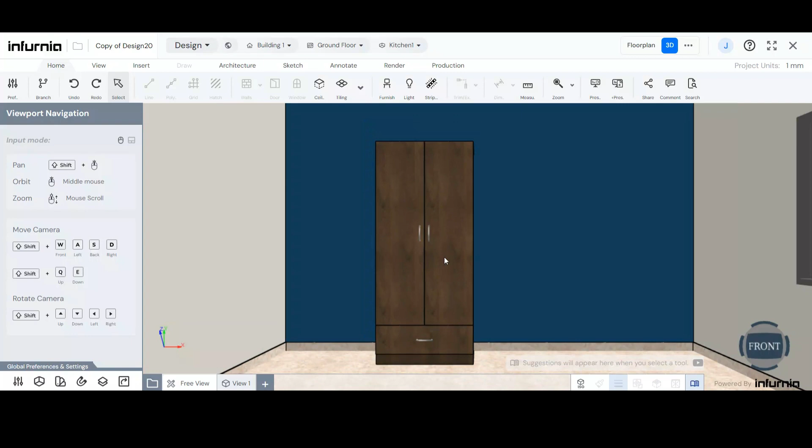You can create a T putty for your shutter by using divisional shutters and then applying a color to the panel. First, select the shutter to which you want to apply the T putty and navigate to the Shutter tab.

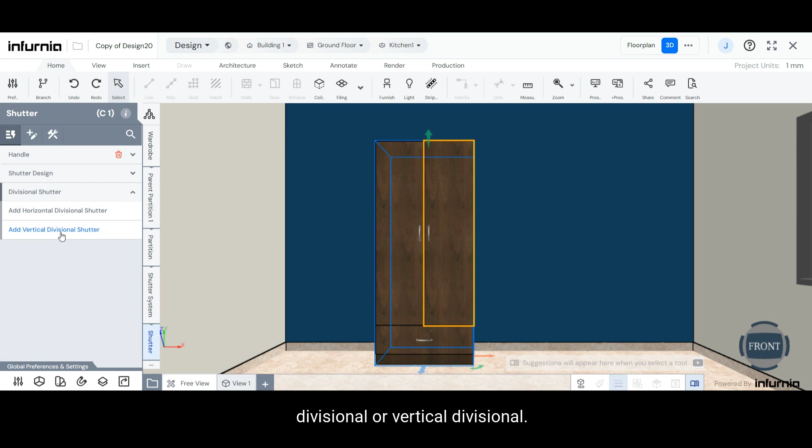Open the Divisional Shutter drop-down menu, and depending on whether you want a vertical or horizontal division, select either Add Horizontal Divisional or Vertical Divisional. I will select the vertical one, and now you can see that it has been divided into two equal parts.

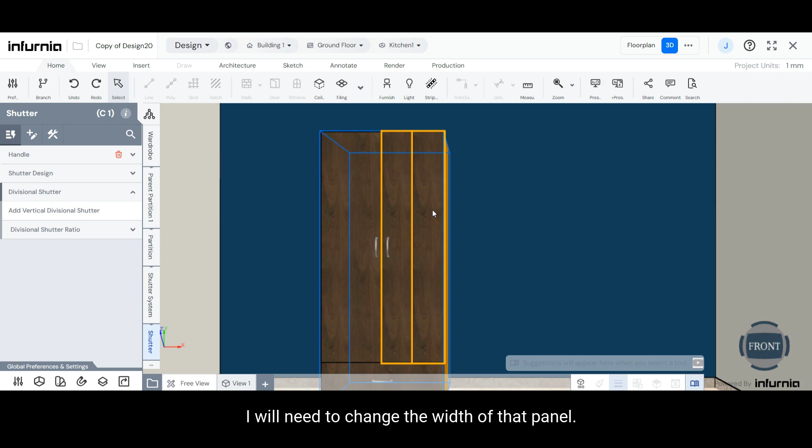However, if I want to convert one of the panels into a strip, which will act as a T-putty, I will need to change the width of that panel. To do so, I'll click on the Divisional Shutter Ratio drop-down menu, and here you can see the ratio between panel 1 and panel 2.

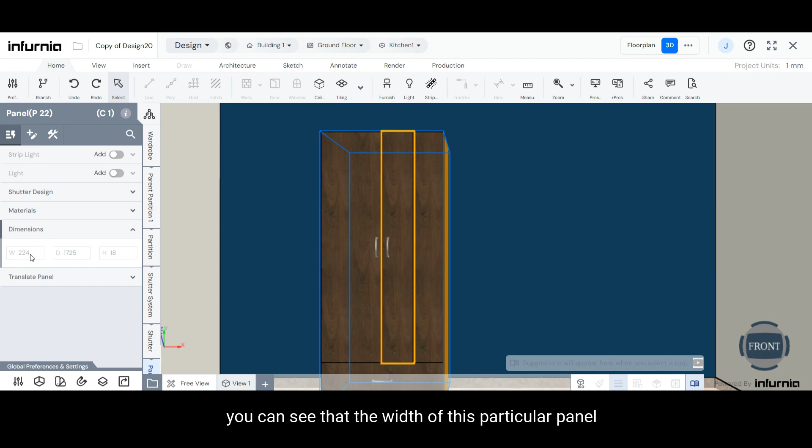When you open the panel tab for this particular shutter and open dimensions, you can see that the width of this particular panel is 224, and the same with the other panel as well, which means the total width of the shutter is 480. Supposing I want to create a 20 T putty out of one of the panels, that means I'll have to change the ratio accordingly.

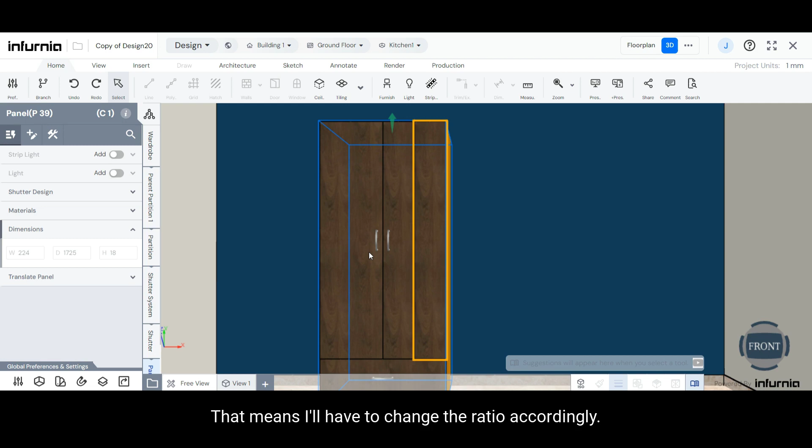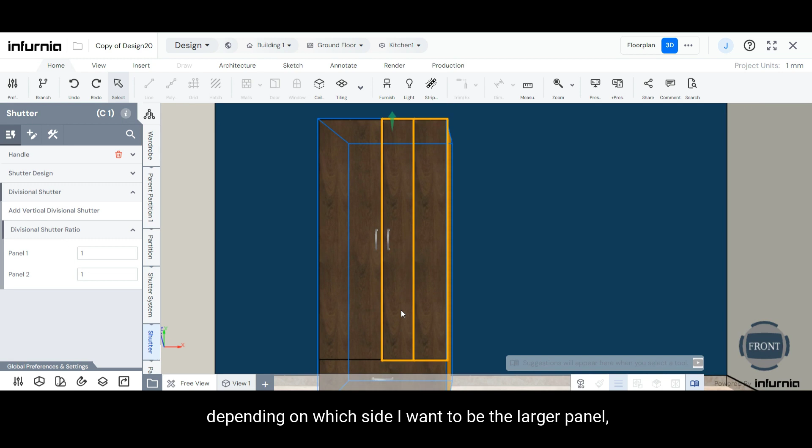In this case, the ratio to go for is 480 divided by 20, which is 24. Therefore, when I go back to shutter, open divisional shutter and divisional shutter ratio, depending on which side I want to be the larger panel, I'll go to that corresponding panel and type in 24.

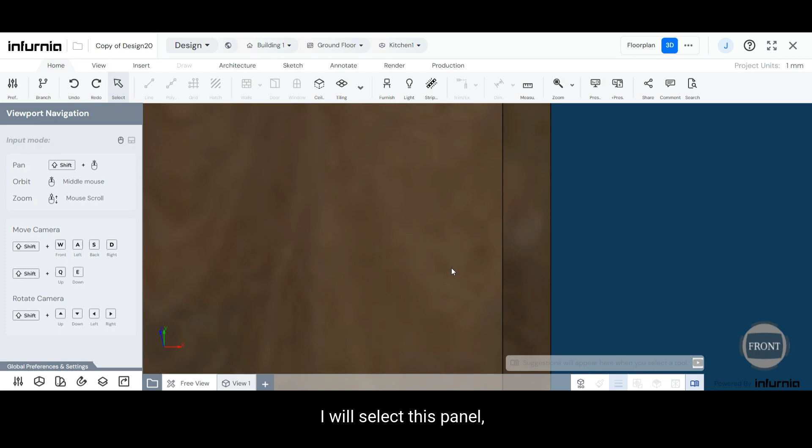Now you can see a T putty has been created. Then, to apply a material on the T putty, I will select this panel, navigate to the panel tab in the left hand panel, open materials, select the material source to self, and select fetch from store against external finish.

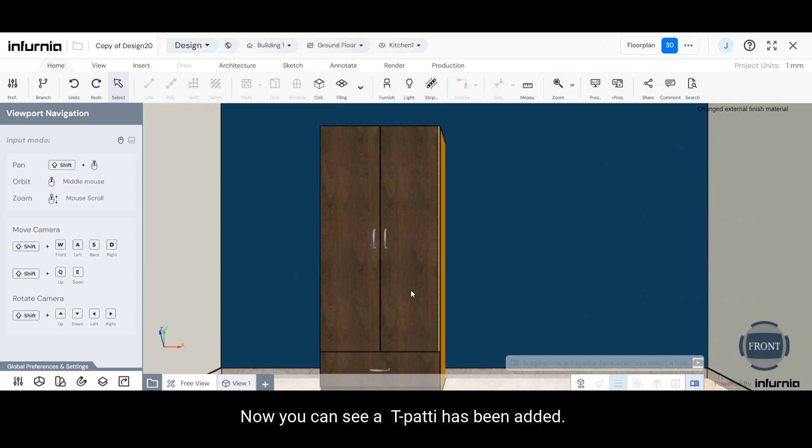I will type in the name of the material that I want and click on that thumbnail. Now you can see a T-patti has been added. However, if I want the T-patti to be in the middle of the shutter, that means I will have to add 3 divisions instead of 2.

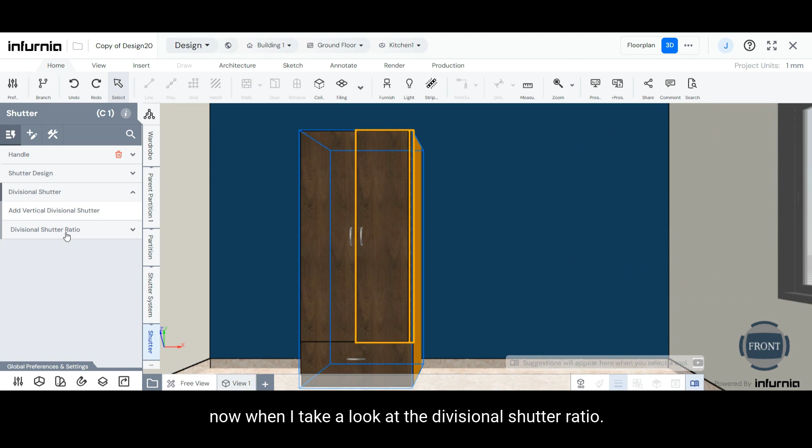To do so, I click on the shutter once again, go to shutter, open divisional shutter, and once again click on add vertical divisional shutter. Now, when I take a look at the divisional shutter ratio, the first panel on the left is the largest one, followed by two thin strips on the right.

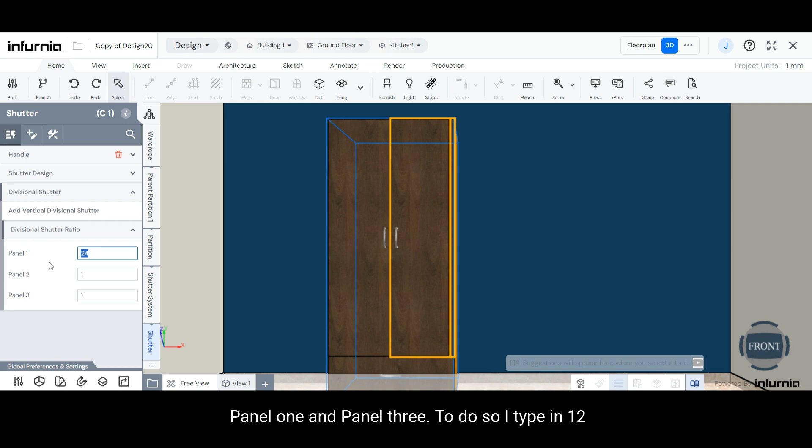To place a T-patti in the middle, we need to distribute the earlier ratio among the two panels, panel 1 and panel 3. To do so, I type in 12 in panel 1 and type in 12 in panel 3.

Now you can see the T-patti, or the second panel, has been shifted towards the middle because the first and third division have been given an equal size.